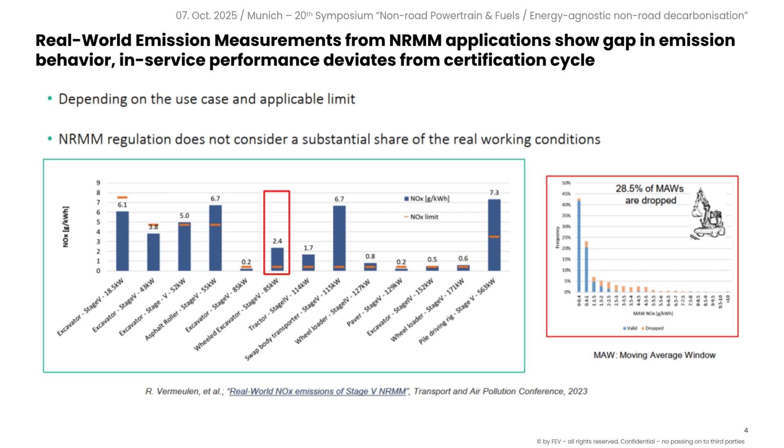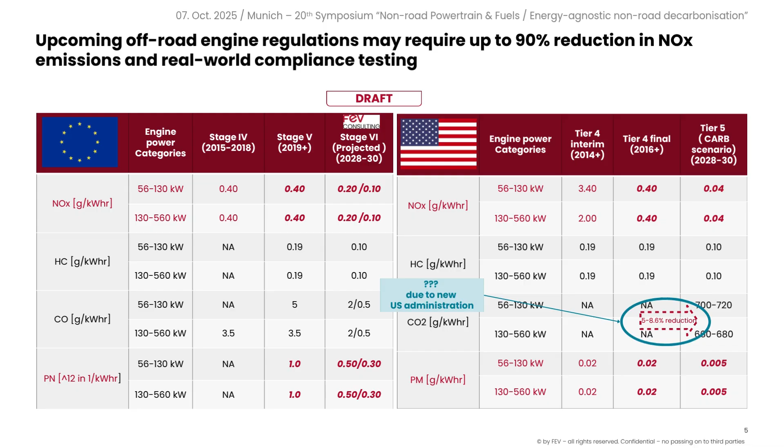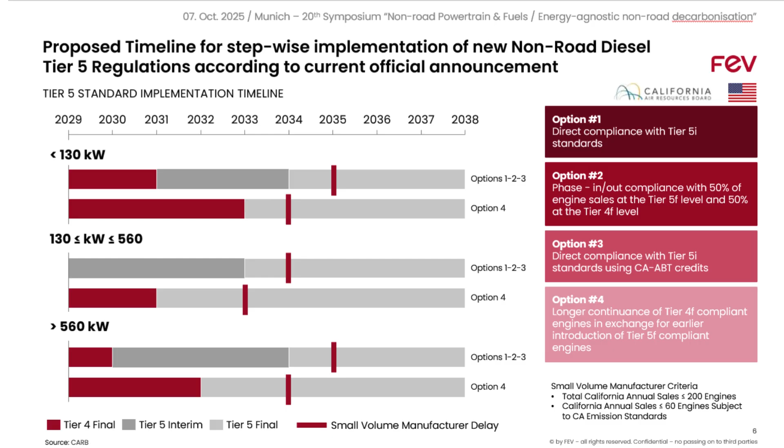It will be eliminated from the final definition of the Tier 5 standards as a function of time, according to our local intelligence in the US market. You can reach these numbers in different approaches. You can either follow the stepwise approach by combining options 1 to 3, or you can go via option 4, by more or less using the time as a maximum to sell Tier 4 final standards and then move your entire portfolio directly to the Tier 5 final standards. There are some delayed deadlines for the small volume manufacturers, which have a little bit more time to meet the emission regulation. But in principle, and according to our knowledge, most of the OEMs which we are cooperating with are following the approach to directly achieve the Tier 5 final standards, because the rather limited time for the interim phase is not really paying off, as you have to develop too many different variants and solutions.

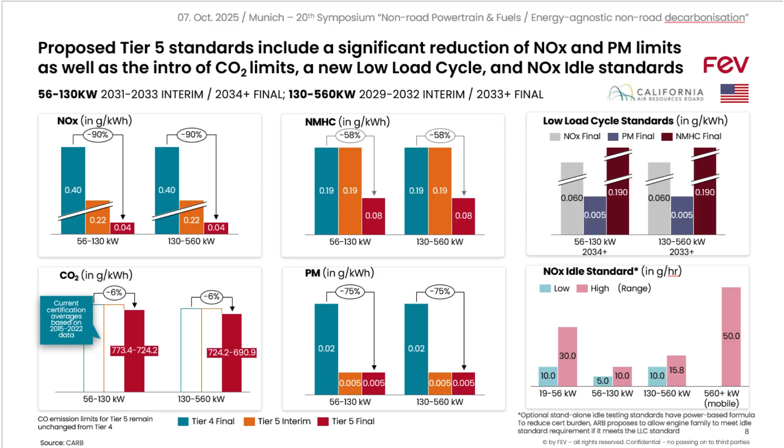But we should not forget that the overall Tier 5 standards consist of multiple requirements, not only on the tailpipe emissions, not only on the CO2 emissions. There is an increased useful life incorporated. There is this additional test cycle. There is in-use testing, which is expanded. There are OBD and OBMD included. There are some SCR inducements formulated. So there's a lot of regulatory framework around the overall emission standard.

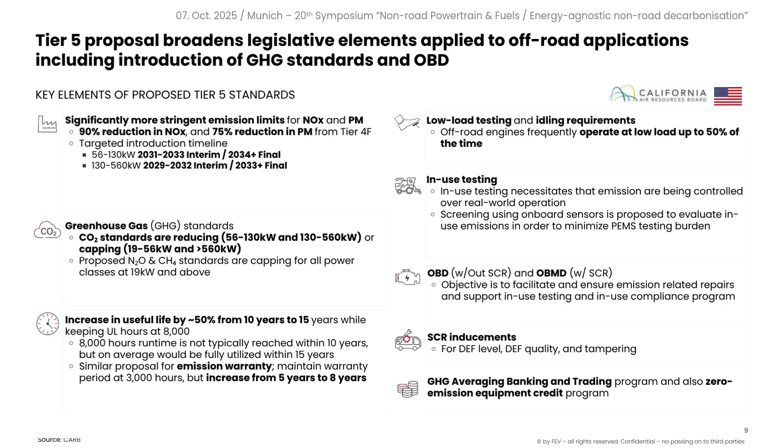Nevertheless, I think we can summarize and compress the requirements on two key challenges. The first one is more or less described by the main test, by the NRTC and NRSC cycle, where we have to achieve a reduction of 90% of NOx emissions and 75% on the particulate matter, which is especially for the cold NRTC cycle a significant challenge.

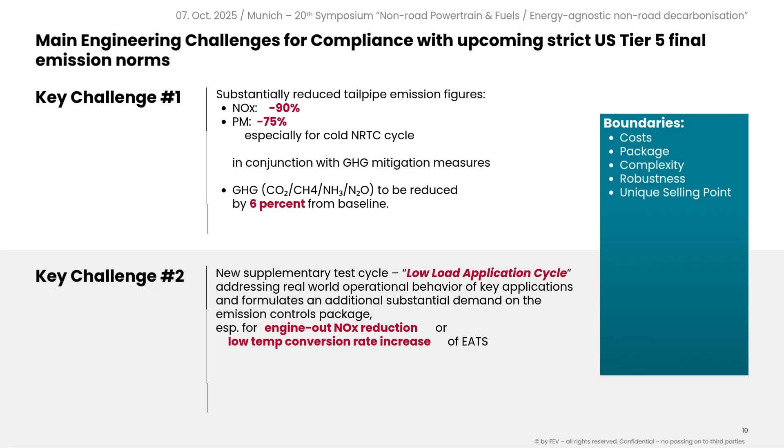And on the other hand, the second key challenge is the new supplementary test cycle with the low load conditions, where we have the massive challenge to meet adequate conversion efficiencies in the after treatment systems in order to pass the thresholds. And for all of these challenges, the solutions have for sure to be developed under quite tight boundaries regarding costs, package, complexity, robustness, and I think all of the OEMs are also trying to identify a kind of unique selling point for their products in order to differentiate from the competition.

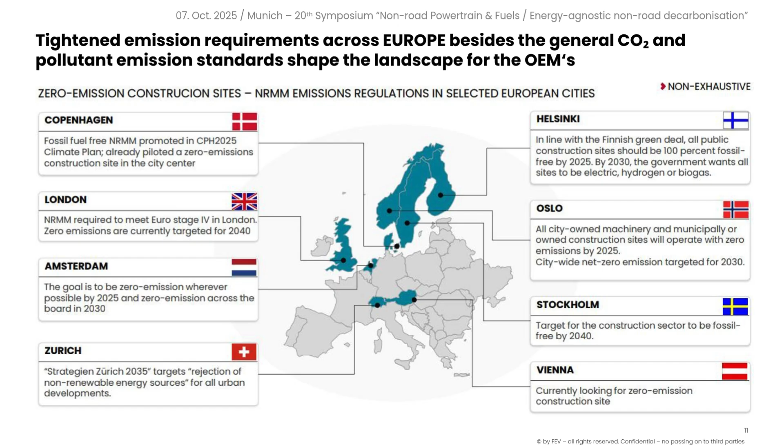This is more or less a driver coming from the overall national or market-wide regulation. Besides this, what we see also taking place in Europe very much is local limitations and regulations, especially in bigger cities, urban hotspots, where the local government is introducing legislation regarding zero-emission construction sites. You see it here on this chart, very much pronounced in the northern countries, the Nordic countries, Denmark, Norway, Sweden, but also the UK, quite prominent here, and also in the Austrian and Switzerland region. We have this tendency by a certain time in the near future that inside of these urban hotspots, fossil-free construction activities or zero-emission activities have to be achieved and safeguarded.

What are the solutions for that? I think we have the classical separation here between the smaller machinery and the larger machinery. For the smaller ones below 56 kilowatt, there's a massive focus on the internal optimization of the combustion process in order to reduce the engine out emissions. For sure, we have to use a particulate filter in order to manage the challenging PM limits. For one or the other application, maybe an external hydrocarbon injector may be needed in order to ensure a proper regeneration.

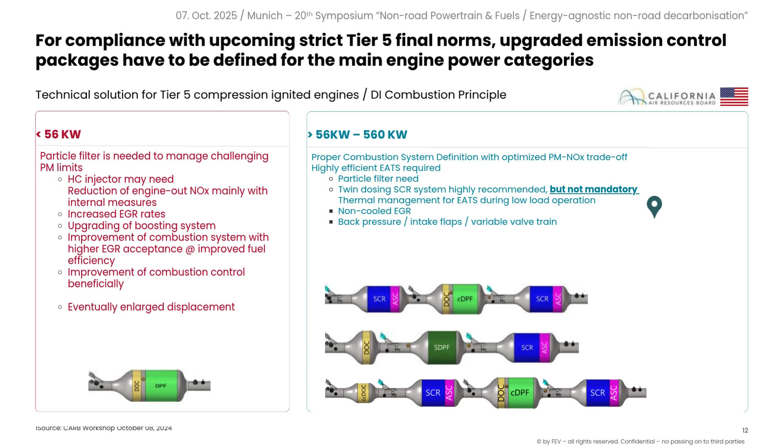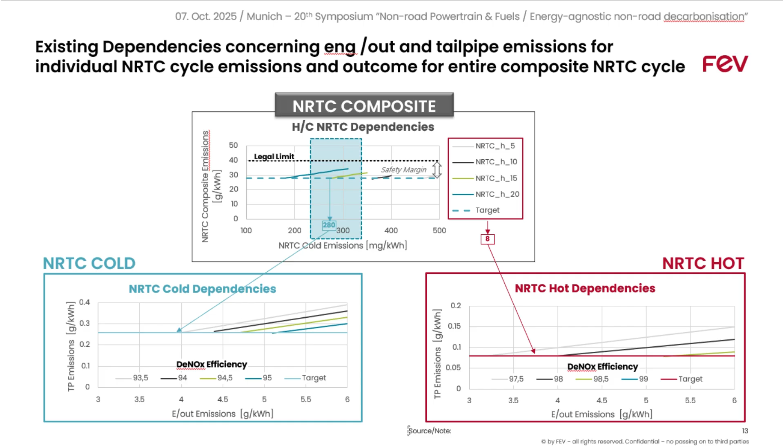For the larger and more powerful machinery, I think we have to realize the solution on the combination of internal measures with quite sophisticated exhaust after treatment systems. However, from our perspective, there's not a clear mandatory need for a twin dosing SCR system. For sure, it is a very powerful exhaust after treatment system which allows a very high flexibility, especially if we also talk about the extended useful lifetime which we have to safeguard. But according to our latest activities, it is not a clear must. We also see a chance to meet this with a more cost-effective exhaust after treatment system based on an upgraded stage 5 emission solution.

So, stepping a little bit deeper into this emission requirement for the upcoming future. As I said, we have two main key challenges, and we have identified 4 major areas for activities in order to meet these legal requirements, focusing on the Tier 5 final standards, which are currently published for the future. So overall, we think that the introduction of a combustion mode coordinator in order to optimize the combustion boundaries for all of the different operational conditions is a quite helpful and good measure.

And then for the key challenge number 1, which is the NRTC, NRSC cycle area, we have to work on the right sizing of the engine, on the right displacement. For example, avoiding eventually higher power densities than 30 kilowatt per liter, or respectively avoiding twin turbo, because it's a massive burden for the exhaust after treatment system, if here this massive piece of metal is between the engine outlet and the exhaust after treatment system. Then for sure, one major part is the optimized combustion system with some kind of cooled EGR, maybe switchable cooled EGR for consideration of the cold NRTC cycle. Then some enhanced and upsized EATS system, and for sure also some new control logics in order to maximize the usage of the potential of the hardware components which are installed on the engine.

For the second part, for the key challenge number 2, for sure also the optimization of the combustion system is essential, because probably we cannot rely massively on the exhaust after treatment system, because we will always be on a rather low level of temperature in the exhaust line.

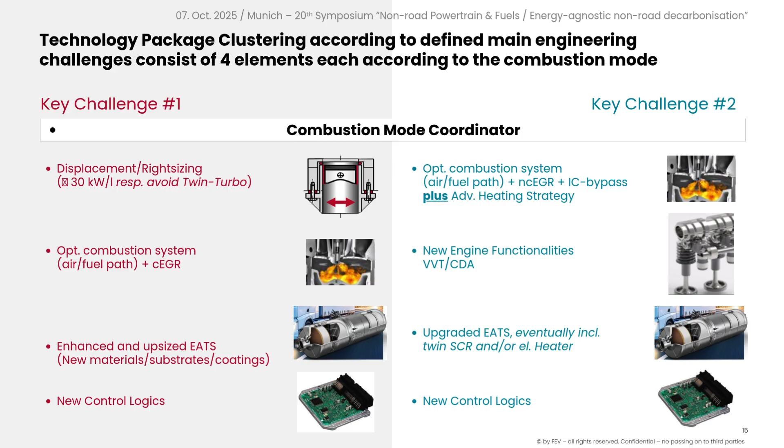So we have conducted a certain kind of deep dive analysis for meeting this for the above 56 kilowatt engine class. So the first example here is coming from more or less the main part, which is the NRTC related portion, where we have to consider the cold and the hot cycle.

So starting from some certified engines which are delivering 80 milligram per kilowatt hour in the current Tier 4 final status, we see here for the NRTC portion of the emission regulation, we see the major part coming from some torque curve reshaping, the introduction of a more flexible and powerful boosting system with a VGT turbocharger and some corresponding recalibration, plus the utilization of hot EGR in order to uplift the temperature level. The combustion system itself and also the exhaust after treatment system probably have only a minor portion,

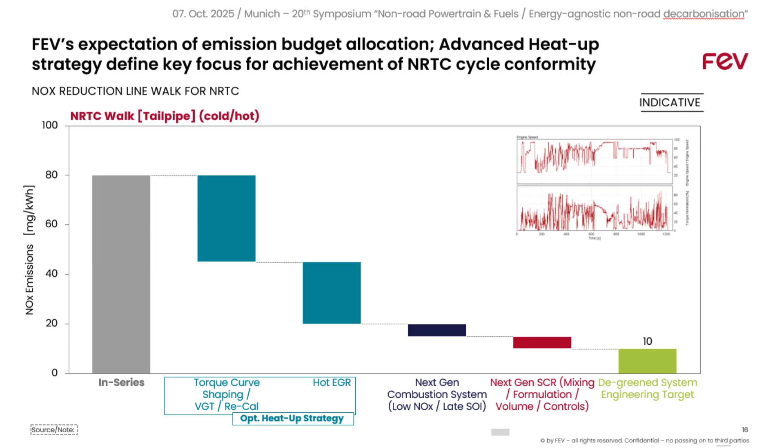and this leads us finally in our walk here to the target for a de-greened system, which is here shown with 10 milligram per kilowatt hour, which is the legal target of 40 milligram per kilowatt hour minus a safety margin for the production scattering of around 25%, and another margin for the aging over the extended useful lifetime, so that the engineering target is somewhere in the region of 10, 12, whatever milligram per kilowatt hour, which currently should be focused on.

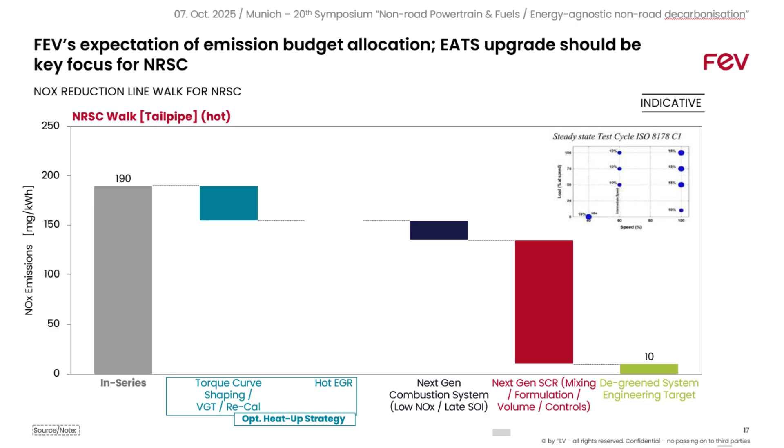If we continue, then the next one is the NRSC cycle, so the steady state cycle, and here we see how the picture changes significantly. So here we have only a minor portion because we are for sure at very hot and stable steady state conditions. Here only a minor portion of the overall result is coming from the torque curve reshaping, VGT and hot EGR stuff. Here the main focus is coming from the exhaust after treatment system in order to meet the requirements under the steady state conditions, which is changing once again if we go to the low load cycle.

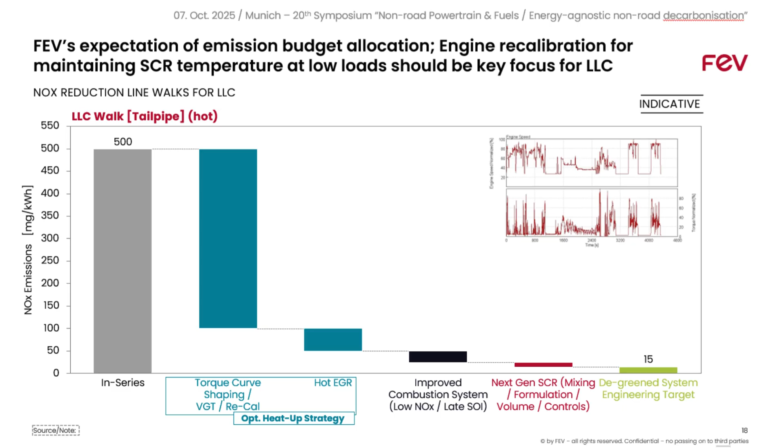So here we have once again a very big focus on measures like torque curve reshaping and hot EGR in combination in order to meet the target, and once again the basic combustion system and the exhaust after treatment system are probably only delivering here a roughly limited share of the overall achievement.

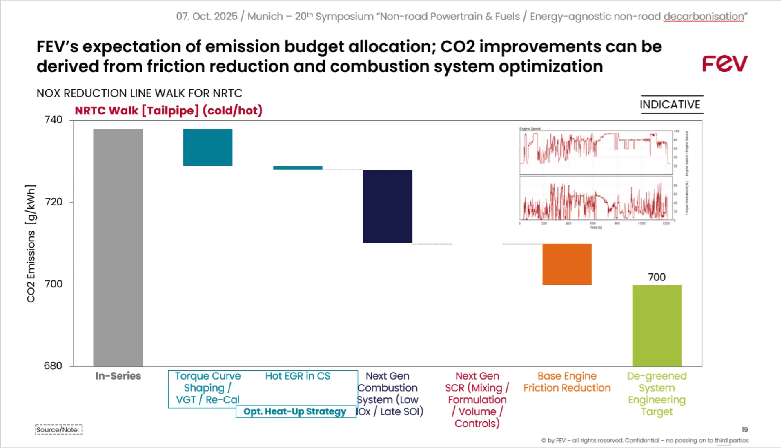In addition, for sure, just for completeness, if we have to meet the CO2 emissions, besides this, also here we have major areas which contribute to the overall result. Here for sure, in terms of efficiency, the combustion system is one of the main aspects in order to meet that, if this is required from the legislation. Otherwise, for sure, friction improvement is another part of efficiency optimization. But here we have to see how the final emission standard will be formulated when it is introduced into the market.

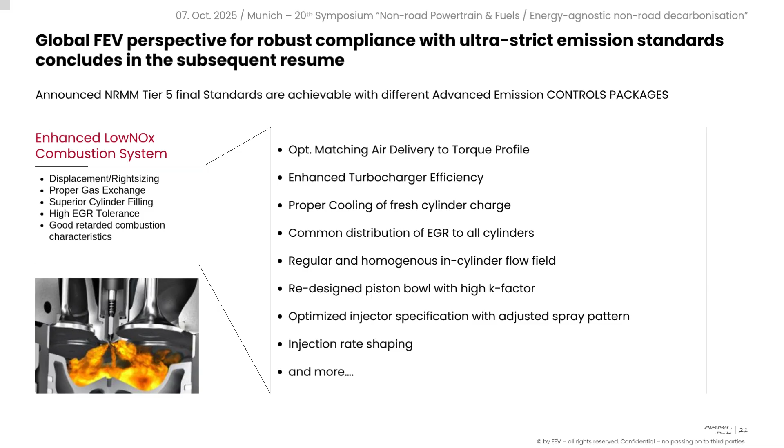So looking into the different areas, that's just summarizing them. So for sure, the base for the future will be an enhanced low NOx combustion system, considering displacement right sizing, a very proper gas exchange, superior cylinder filling, a very high EGR tolerance, and good combustion characteristics for a rather late retarded combustion. For the advanced rapid heat-up measures and technologies, we can consider intake throttling, hot EGR, EGR bypass, internal EGR, exhaust VVT, thermal shielding of the components, and multi-post injections.

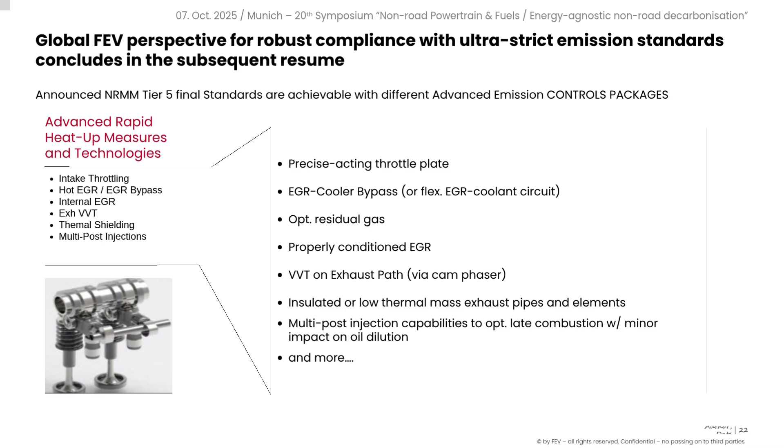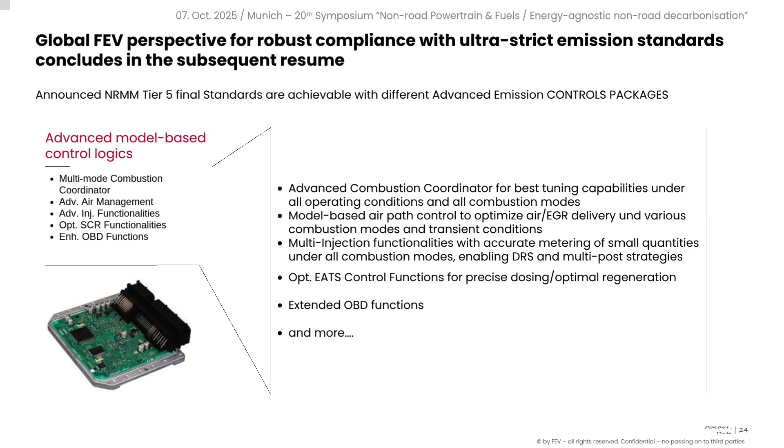And further on with the other technologies, I think you can read it by yourself. I don't have to guide you through the different aspects of these pillars here for the overall achievement of the targets. So coming furthermore to the overall machine efficiency.

So if we have a closer look into the current situation, we have a quite surprising outcome where we can see that more or less the overall consumption split in the non-road mobile machinery is very much covered by the heavier machinery. So more or less 78% of the overall fuel consumption in this NRMM sector is consumed by the big machines, and the small machines, even having a large portion of the overall sold products and models, are just below a quarter more or less. So for sure, which means for the below 56 kilowatt, fuel consumption improvement is not a main priority, at least not a main driver.

Here the cost for purchasing the base product, plus service and maintenance, is much more dominating than the real world fuel consumption. The fuel consumption kicks in as the engine output increases.

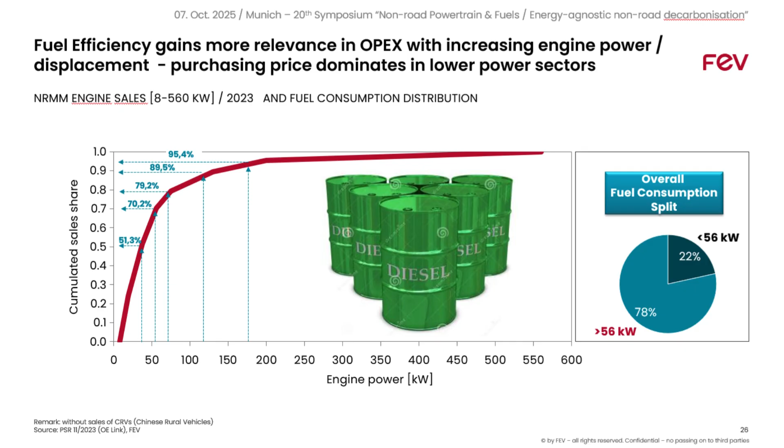But as you have seen before, there's a difference between certification cycles and real world all-day operational cycles. Here we identify different areas of load coverage in the engine map. Looking at the upper left, middle left, on wheel loader, the main operating areas are over the entire speed band, but in low and mid load ranges for sure.

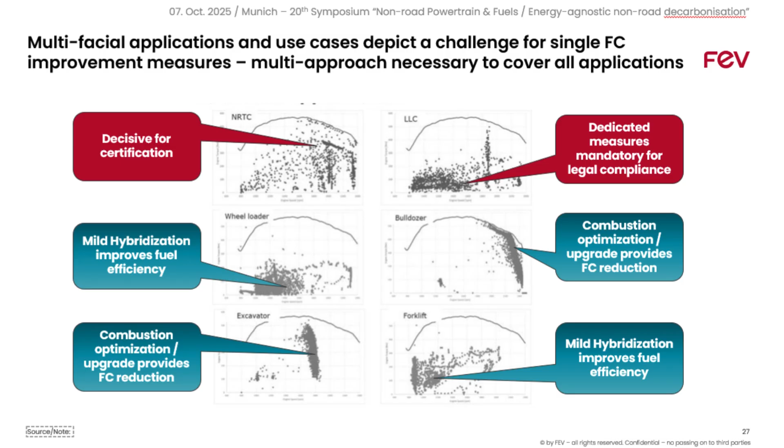If we go to a bulldozer application where the load profile concentrates on rated power, rated speed conditions, the clear way forward is not mild hybridization to reduce real world fuel consumption, while continued combustion system optimization provides significant fuel consumption improvement. It's always worth looking into other applications.

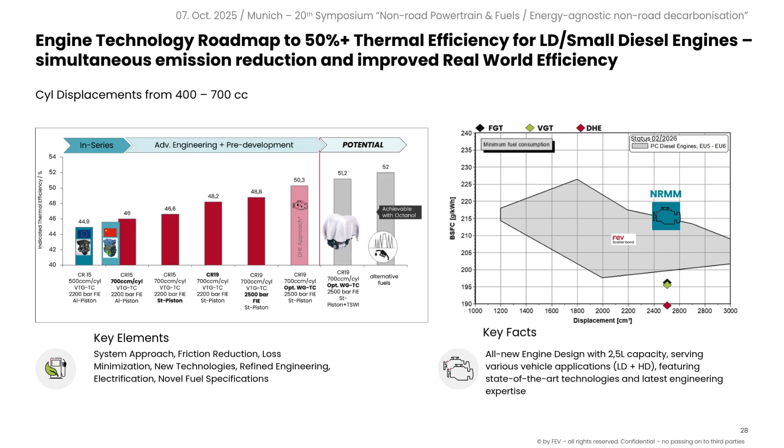If we compare this, on the right side in the scatter band, some typical non-road mobile machinery in the 2.5 liter class segment, and see the gap towards the latest announcements from the light-duty side, there's a significant gap between what is possible from the base engine side versus what is currently on the market. A good recommendation is at least to halve the gap in comparison to on-highway applications.

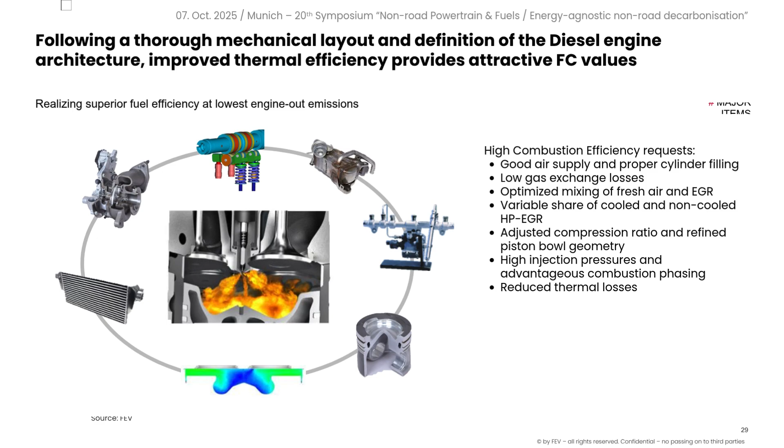I pointed out that one major element of future success in non-road mobile machinery is a proper combustion system, and that we need quite high EGR tolerance, because we have to work with quite high EGR shares in the future in order to meet ultra-strict emission requirements. We need variable shares of cooled and non-cooled EGR under several operational conditions.

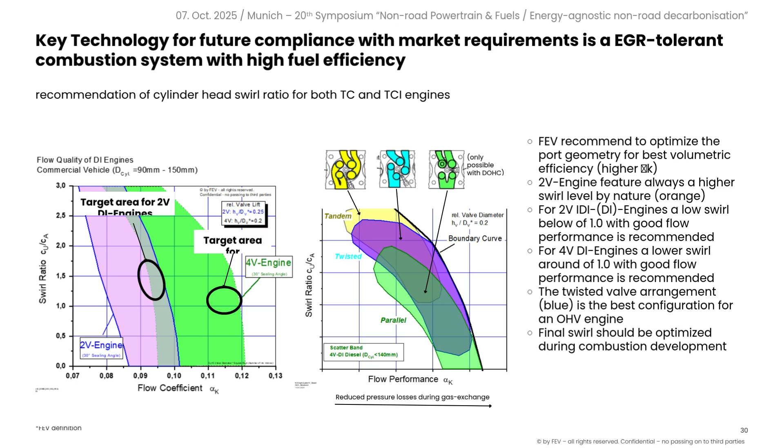In this context, the air supply is one of the key elements. Coming from a lot of experience in on-highway applications, we have to look closer at what is driving development forward there in recent years. One element is the so-called seat swirl chamfer, which provides the opportunity to decouple the intake flow from swirl generation, due to some eccentric chamfer at the fire deck of the cylinder head.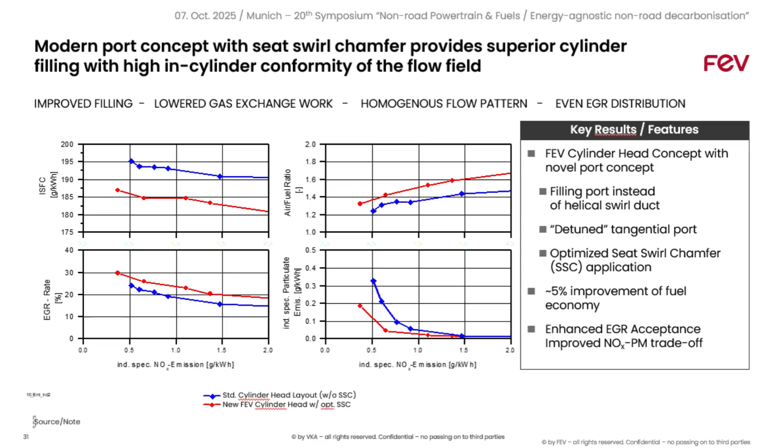If we compare this on a one-to-one engine comparison, with same compression ratio, same boost, same injection pressure, we can see that this different air supply, with much better cylinder filling, provides a significant improvement in the combustion process itself, resulting in better efficiency, higher EGR acceptance, and an improved NOx particulate trade-off, because we run the engine typically with higher air excess, meaning less soot and better fuel efficiency.

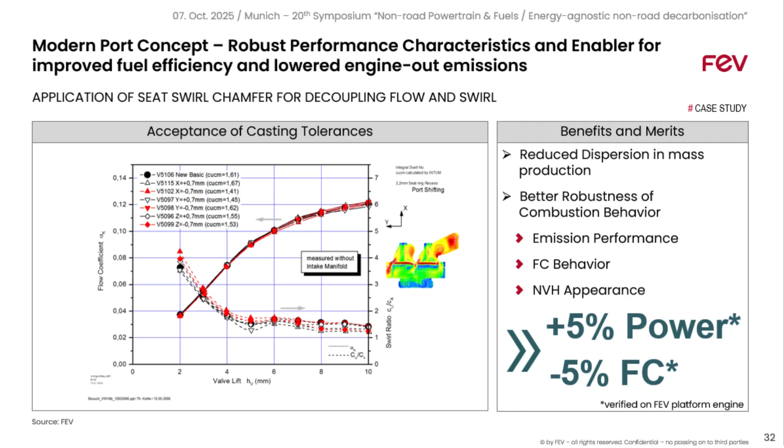The second aspect of high importance is improved coverage of production scattering. Here's an example of shifting the valve position by plus minus 0.7 millimeters in all three dimensions, X, Y, and Z axis, and you see the swirl behavior more or less maintains as the nominal status. This means engines from the production line are very robust and identical, so the calibration engineer can go to the limits in calibration without considering massive reserve and safety margins for production scattering. That's for the basic combustion system.

Coming to the other topic, we see, from on-highway installations, both light duty and heavy duty, increasing interest and tendency to go to kinds of hybridization. In some areas more mild hybridization, in other areas more strong hybridization, even going up to serial hybrids.

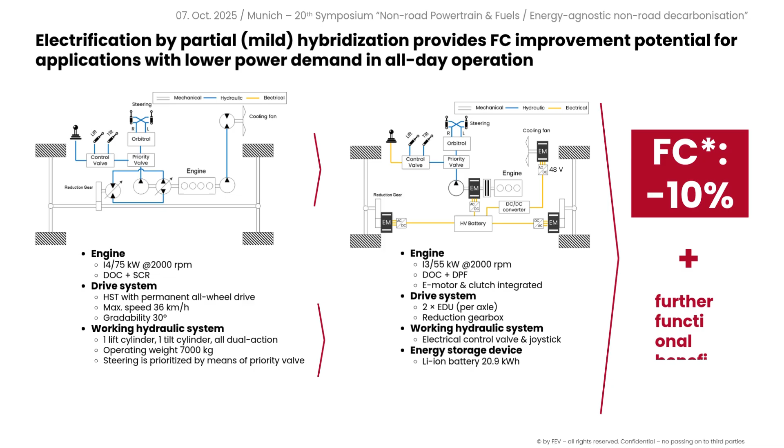Here's one example for a construction equipment machine where we replace the original 75 kilowatt engine with a smaller inline-3 of 55 kilowatt, adding an e-system to the overall application. This resulted, in one main cycle, in up to minus 10% fuel consumption improvement, plus further functional benefits in the operational profile of the application.

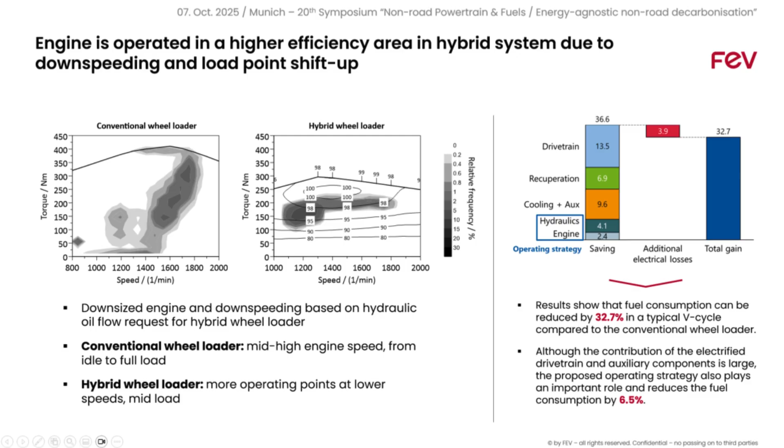If we go into other details and have a closer look into the different speed and operational targets, we could even identify an improvement up to 33% in the typical V-cycle of the conventional wheel loader. But it is always a portion which consists of the improvement on the hardware in conjunction with the proper operational strategy in order to maximize the benefits of the usage.

Then stepping over towards carbon neutrality finally, I think we have heard this also in some of the speeches before. We have to change the fuel, get rid of the fossil elements, and here we have in principle an overview about the conversion towards hydrogen operation, so typical development steps starting with system design, going over the system optimization, prototype testing, and then coming into the concept demo and the proof of concept for the generation 1 conversion, in this case of the 2.5 liter engine, which we executed, for example, for different companies in the

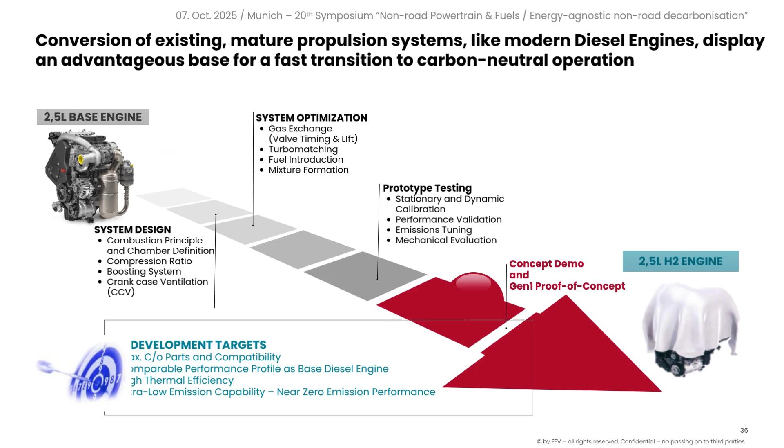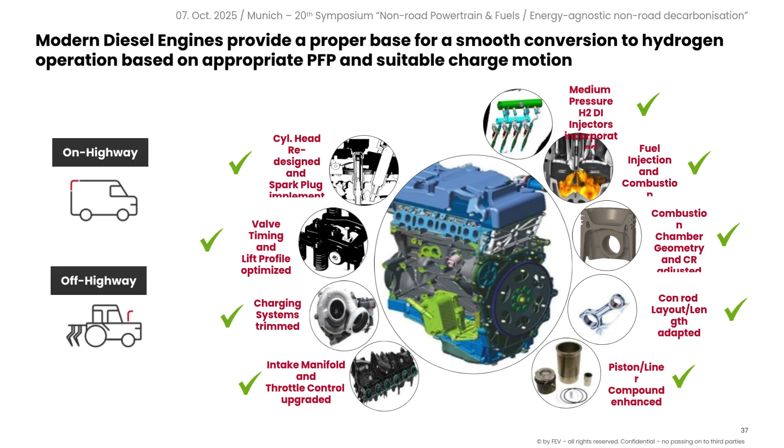recent past. The main areas which we have to touch in a successful conversion from a typical diesel engine towards hydrogen operation are summarized here. So we have to redesign the cylinder head, we have to work on valve timing and air supply, trim the charging system, include an adjusted intake manifold with a more sophisticated, more precise throttle control, implement the medium pressure hydrogen DI injectors, adapt the fuel injection and combustion strategy, the piston design, the conrod design, and also have some look on the piston liner compound, as we have the risk of accumulation of hydrogen in the bottom end of the engine in the crankcase, which can cause for sure some issues in longer operation.

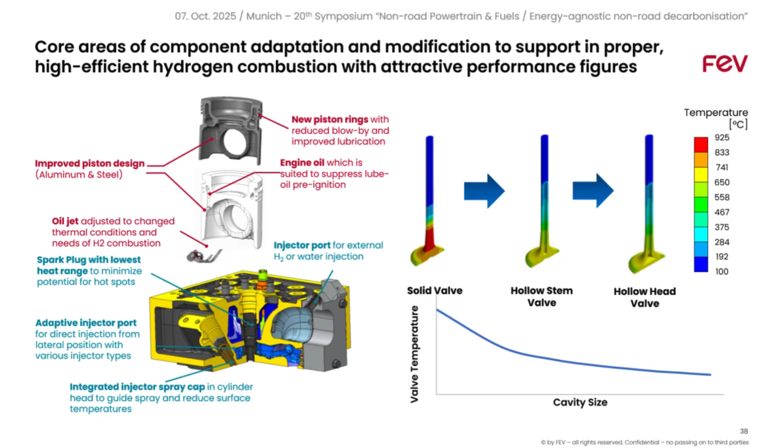Main areas where we have to work in order to avoid abnormal combustion and pre-ignition are found for sure in the piston design, in the charge motion, where normally the diesel engine with a swirl supported combustion principle is not the optimal starting point, so we have to work on bringing in tumble motion towards the combustion system in order to mitigate these abnormal combustion effects and pre-ignition events. Sometimes we have to work on the valve if we want to go to higher load and higher efficiency levels, have to avoid the hot spot coming from the valve situation in order to suppress the abnormal combustion events. This can also for sure be supported by numerical simulations, introducing different methodologies, trying to homogenize the mixture formation in the combustion process by more pronounced charge motion and spray guiding.

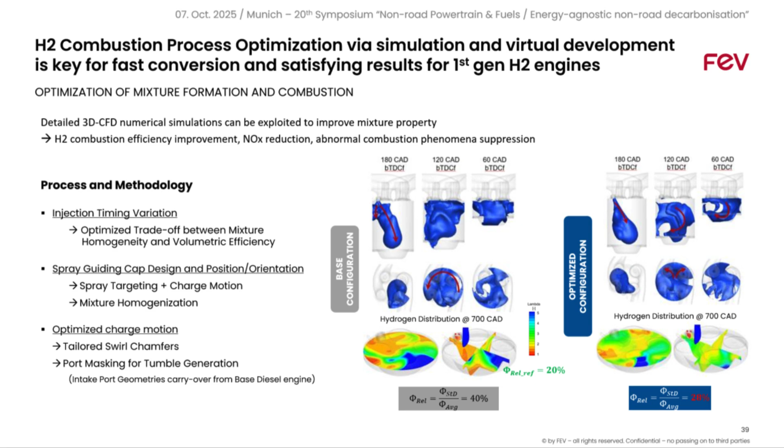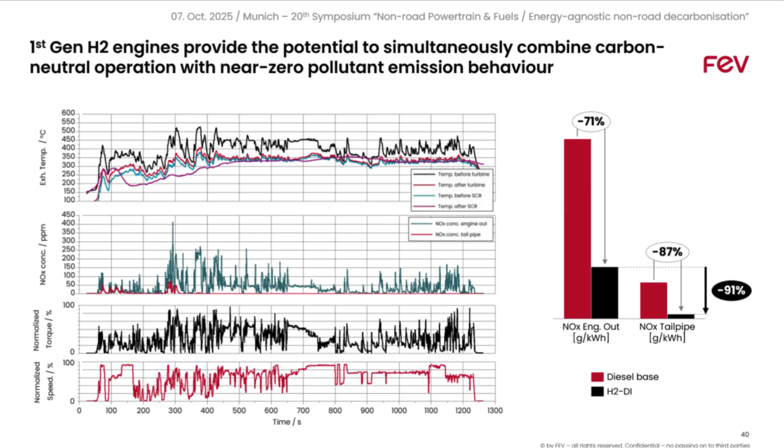Nevertheless, from a FEV perspective, we would summarize that we would need, for some kind of, I would call it, social requirement, some kind of SCR system on board of the application, and we would also recommend putting in a particulate filter, maybe an open or a gasoline type particulate filter, in order to be protected against any kind of public concern with regard to particulate emissions, even while meeting the legal targets, just to avoid stress coming from the public side, and also to be prepared for a discussion maybe 5 or 10 years after introduction of the model. I think this is a learning from the recent past, that the interpretation of regulations as we did it 10 years ago may not be maintained in the coming years.

So, coming finally to my summary and conclusion. Within my speech under the headline Squaring the Circle, I first described the upcoming challenges for non-road mobile applications. Emission reduction is on one hand for sure a driver for technology improvement and upgrading, besides the fact of carbon neutrality, going either mostly hydrogen, for sure also ammonia, but this is maybe more for the marine and larger engine applications.

Then I pointed out that we see a major contribution from an optimized combustion system in order to meet the ultra-low emission requirements in the future, while simultaneously improving the fuel efficiency of the application. The US Tier 5 final standards can be met by a proper matching of the engine-out emissions by the combustion system with a carefully designed exhaust aftertreatment system, and for sure hybridization can support robust and long-lasting emission compliance, especially if you also consider the extended full useful lifetime settings.

And hydrogen, as mentioned before, also represents for us the main route for defossilization in the non-road mobile machinery sector. The PFI solutions depict the cost-attractive, fast-to-market solution.

Mid- and long-term aspects are going towards the DI combustion principle, going to higher performance density and higher efficiencies. Knocking and abnormal combustion events describe key challenges for the hydrogen conversions, and in-cylinder charge motion is for us one key aspect in order to make a principal improvement on this tendency of pre-ignition, knocking, and abnormal combustion, because this is working on the main source.

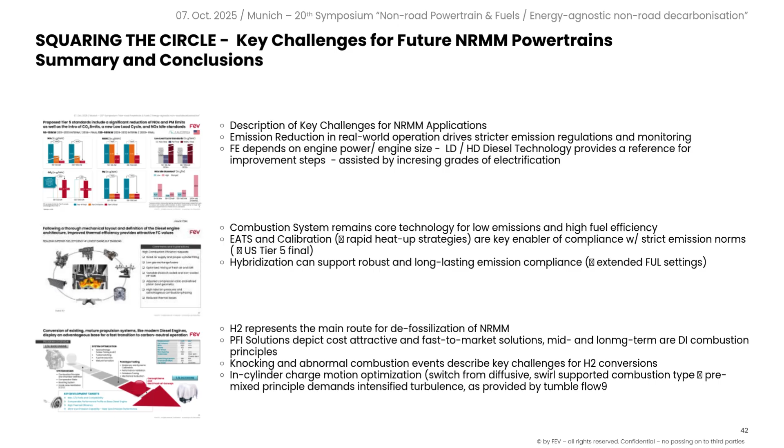Thanks, Thomas, for that very nice, detailed technical presentation. A little bit of a step change from the others, but quite important in this first session to cover every base. Quick question for me. SCR under 55 kilowatts, do you see any need 37 to 55 for SCR in Tier 5 potentially or not?

Hopefully not. I think that's sorry for the catalyst providers, but I think for the OEMs, we know the very tight packaging for the small machinery, and unfortunately maybe the OEMs would require smaller diameters, but the offers are maybe more in the standard categories, which makes it rather short but wide, which is not good for preparation and good efficiency, so therefore hopefully not. I think fortunately that in Tier 5 in California, below 130 is preempted anyway, so they might not. I think they're hoping not to, but in the future, who knows.

Any questions on the floor before we move on to me? Yeah, Alan Tolley, JCB. Thanks, Thomas. Very interesting presentation. A question following up from the one previously on hybrids. You mentioned hybrids here for efficiency improvement. Do you see an opportunity for hybridization or electrified engines for emissions control? I'm thinking thermal management, transients, etc., thereby simplifying possibly the after-treatment system.